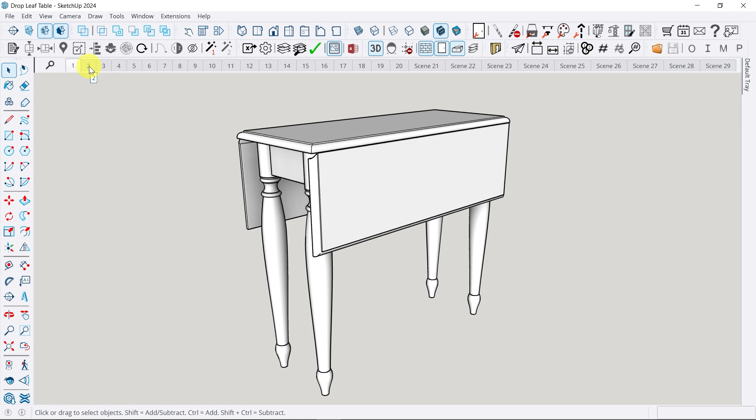To complete the framework for this drop leaf table, we needed 9 parts in total. All these parts have the same width and thickness, so all we had to do is pay attention to the exact length of each part, so they're ready to be put into the CNC machine to receive the joinery processes.

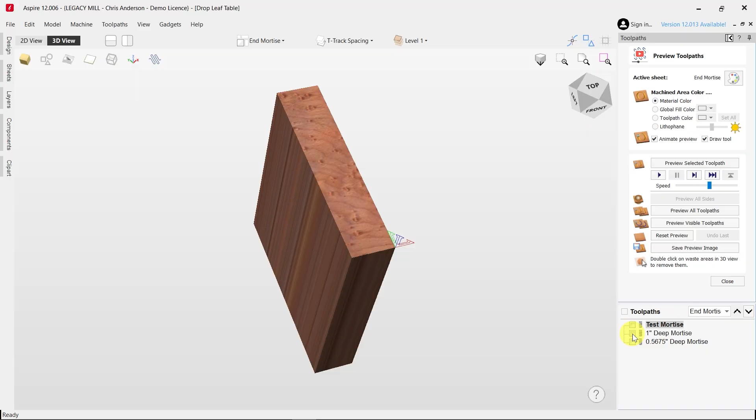Because I make enough mistakes during the woodworking processes, to keep myself organized and reduce those mistakes, I marked the blanks according to which joint goes where. In order to complete the 20 machining processes for this frame, I needed 5 test programs and 8 finished part programs. The design and programming for this project was done in the Aspire CAD/CAM software.

The main type of joinery we're adding to these parts are mortises for floating tenons, but we'll also incorporate finger joints for a wooden hinge on both sides of the frame. Throughout this demonstration, I'll be using 2 different workstations, the vertical and horizontal workstation, in order to cut on different sides or faces of the parts.

On the horizontal workstation, we attached a T-slot table and were able to quickly set up a clamping fixture using Legacy's low pro clamping system.

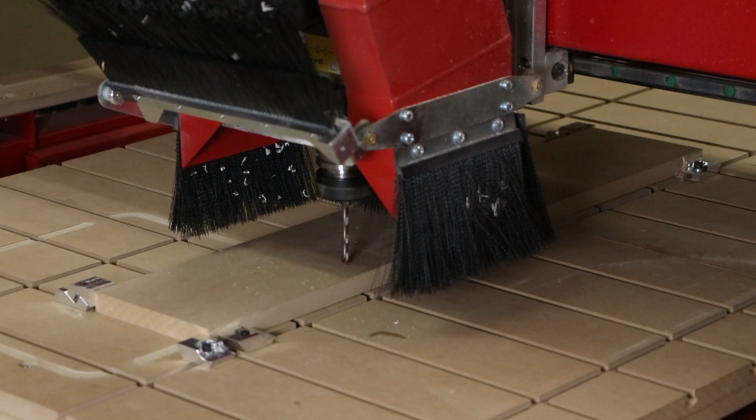This first component I'm putting into the CNC is not one of the original 9 parts for the frame, but this will become a vertical fence fixture for the hinge joint. The machining process only used 2 cutters: a 1/4-inch drill bit to drill holes for fixture alignment, and a 1/4-inch up spiral cutter to cut out the exact size of the fixture plate.

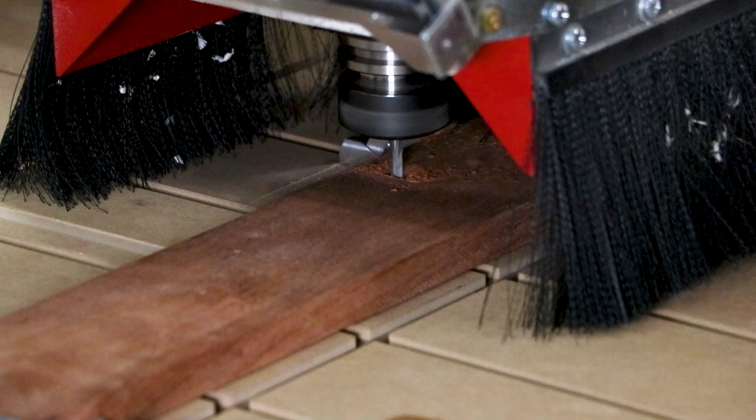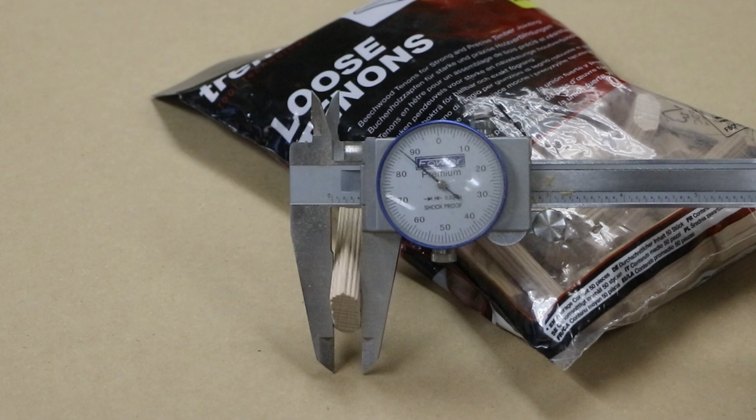Next, we applied mortises to the center of these long rails. Because we're making the mortises on the CNC, we have the ability to control the size to anything we want. So I have the choice of making my own floating tenons or purchasing them. Here I ordered some floating tenons from Amazon and measured them with my calipers so we can match the size to the mortise.

The convenient thing about these low pro clamps is that it's really easy and fast to adjust the clamping fixture to accommodate different part sizes. To simplify the setup process, I kept the corner closest to us at the same 0 position for every single part.

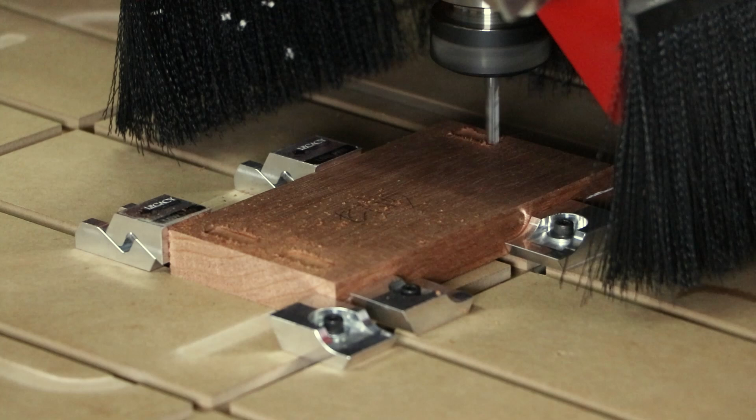I mentioned I needed 5 test programs. Here's how I used this test program to make sure these mortises are perfectly centered in the material we had. The test program cut the same mortises, but instead of cutting over 1/2 inch deep, I only cut 0.05 inches deep.

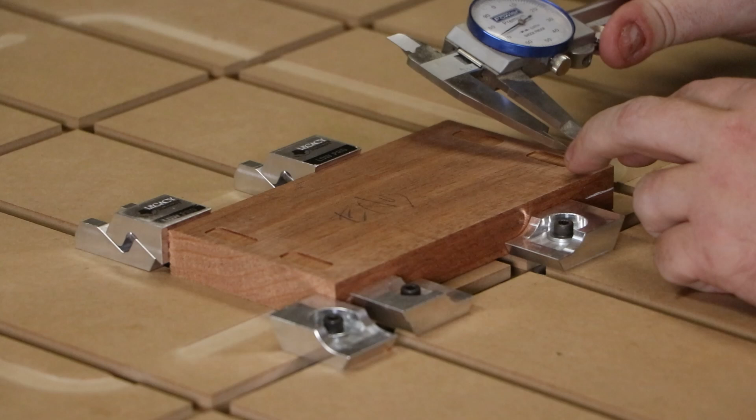Now I have physical edges that I can measure with calipers. Using a little math, I adjusted the 0 point by only a few thousandths of an inch to ensure these mortises are cut perfectly in the center of our part.

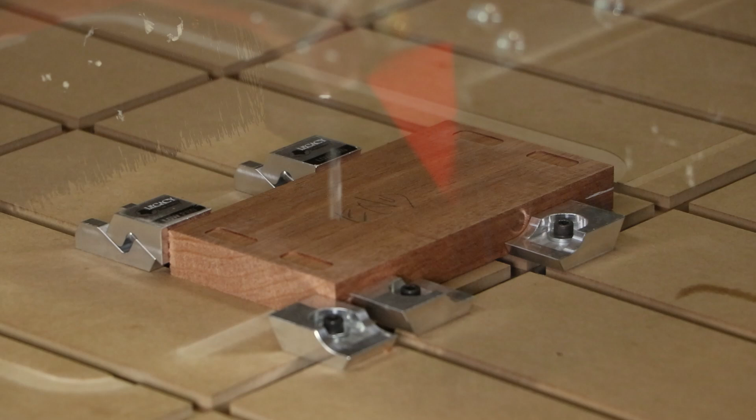Now we can cut the finished mortises on the same component. Even if the test cuts were slightly off, they'll be completely hidden and filled with glue during the glue-up process anyway.

And now it's as easy as switching out our components and running the exact same program, and we can apply the mortises to the exact same locations on this part.

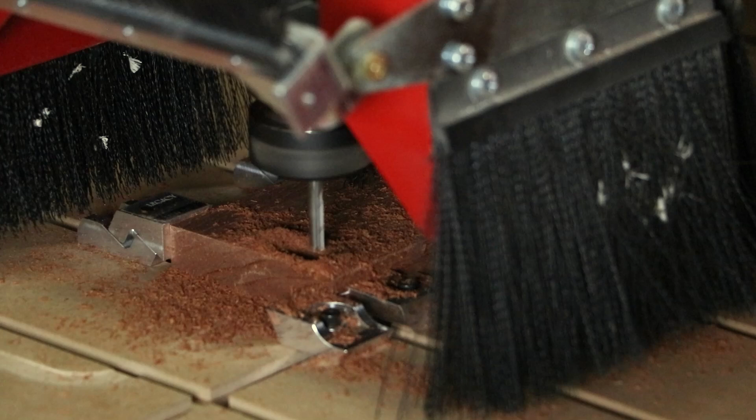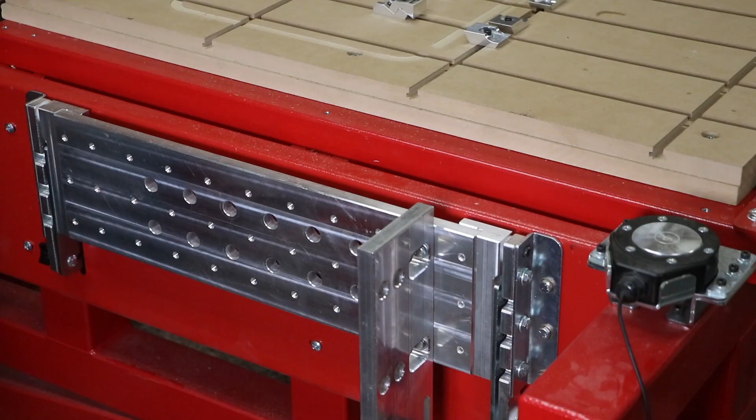Now that we've finished all the horizontal workstation processes, we can go to the vertical workstation to get access to the ends and edges of our parts. This module is called the X-Axis Vertical Clamping Station and can be added to the Maverick E-Series at any time. This workstation is the main hero for all of the joinery. Without this, we'd have to apply the mortises using other tools and equipment.

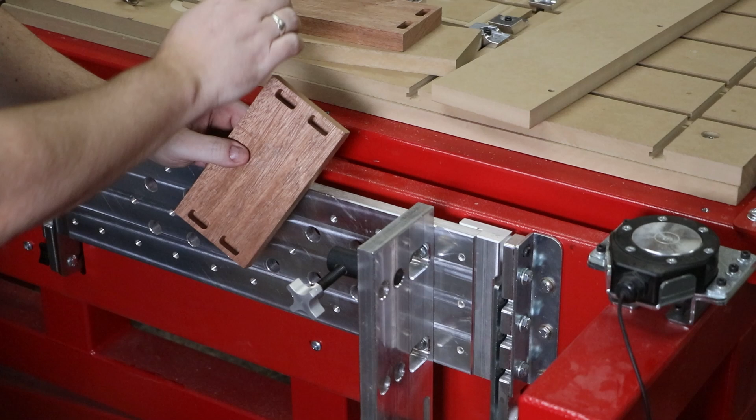Here I'm going to take the 2 end rails that we did on our horizontal work table, and we're going to apply mortises to the ends of these same components. Because I have existing mortises on the main face of the part, I want to reduce any chances of the edge of the material breaking out during machining by supporting the main face with an MDF backer.

Instead of setting up a stopping fence on the bottom of the part, which we can do, I went for setting up a stop on the top of the part. This allows me to position the top of the part in the exact position every time, regardless of the length of the part. The 5/8 through holes incorporated into this vertical clamping fixture make it really easy to get parts in and out of the machine using these pin clamps.

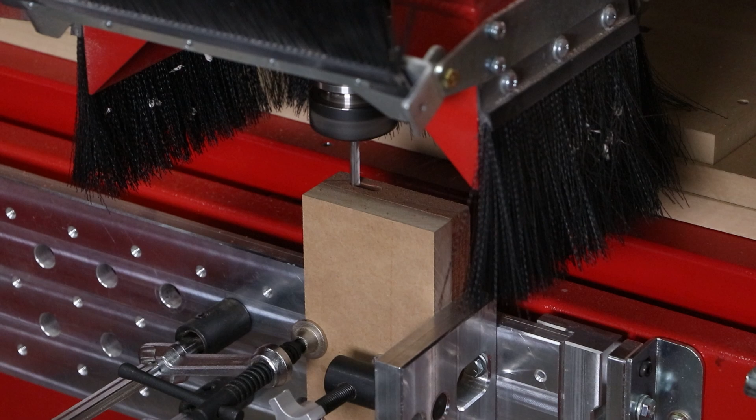Here we're going to apply the same technique of performing a test cut and measuring it. Again, the beauty of CNC is repetition. Once you have the setup procedure correct and the cutting is exactly where you need it to be, I can repeat that process as many times as I need, really, really fast.

These end rails are unique in that they are not symmetrical. The mortises are only applied to one end of each part instead of both ends. Because I had just finished components that only required mortises on one end, I brought in another batch of parts requiring the exact same mortises but again only on one end. These 4 components are the hinge rails, so one end will receive mortises while the other end will receive finger joints.

Now that we completed the parts that only needed mortises on one end, I needed to bring in the rest of the parts that needed mortises on both ends. This is the 3rd batch that will receive the exact same cutting process. In total, it took about 15 seconds to cut each mortise, so once you have the setup process complete, you can pump these out really, really fast.

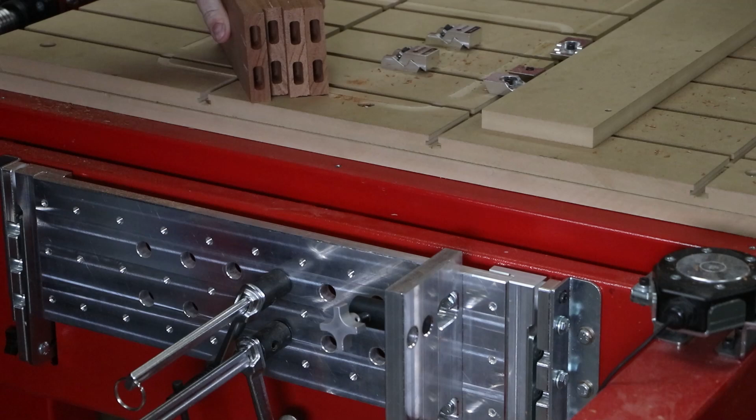Okay, now we've completed all the mortises for every single part in the frame. Let's bring back the hinge components that already received the mortises, and this time we'll work on the other ends to apply the finger joints.

To produce both the mortises and the finger joints, we used the same 1/4-inch up spiral cutter. Now I have to be careful and keep myself organized because the short hinge requires a 4-pin finger joint program and the long hinge requires a 3-pin finger joint program.

For the 3-pin joint, we actually created these score marks on both edges to help reduce the tear out when cutting the ends of the finger joint.

Before this, I did a test cut with sample parts to find out what my allowances needed to be. In total, I gave each finger joint pocket a 7/1000th allowance, and this made it so that it became a hand press fit and not a hammer press fit.

Okay, we only have one more machining process to complete, and that is drilling a hole throughout the entire width of the hinge so we can apply a dowel.

In order to drill this hole exactly where it needs to be, we needed some kind of guide, which is what the MDF fixture was for. Here I brought out an old template making technique using painter's tape and CA glue to hold the parts in place. I was able to line the corner of the blank to the corner of the MDF.